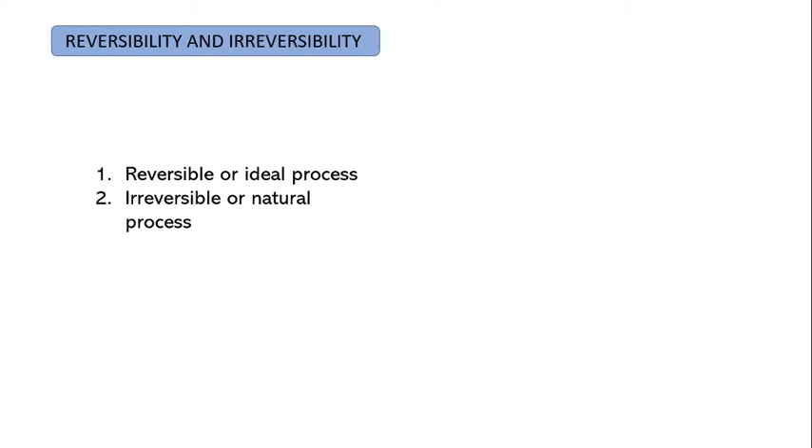A reversible process is one performed such that at the conclusion of the process, both the system and surroundings may be restored to their initial state without producing any changes in the rest of the universe. Let the state of a system be represented in the xy coordinate, represented by A, and let the system be taken to state B by following path AB. If the system and surroundings are restored to their initial states and no change in the universe is produced, then process AB will be a reversible process.

In the reverse process, the system has to be taken from state B to A by following the same path BA. A reversible process should not leave any trace or relic behind to show that the process had ever occurred. A reversible process is carried out infinitely slowly with an infinitesimal gradient, so that every state passed through by the system is an equilibrium state. So a reversible process coincides with a quasi-static process.

Any natural process carried out with a finite gradient is an irreversible process. A reversible process, which consists of a succession of equilibrium states, is an idealized hypothetical process approached only as a limit. It is said to be an asymptote to reality. All spontaneous processes are irreversible.

Time has an important effect on reversibility. If the time allowed for a process to occur is infinitely large, even though the gradient is finite, the process becomes reversible. However, if this time is squeezed to a finite value, the finite gradient makes the process irreversible.

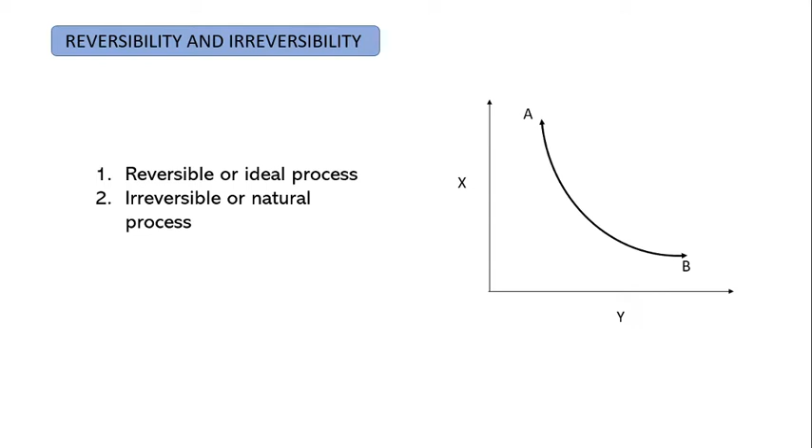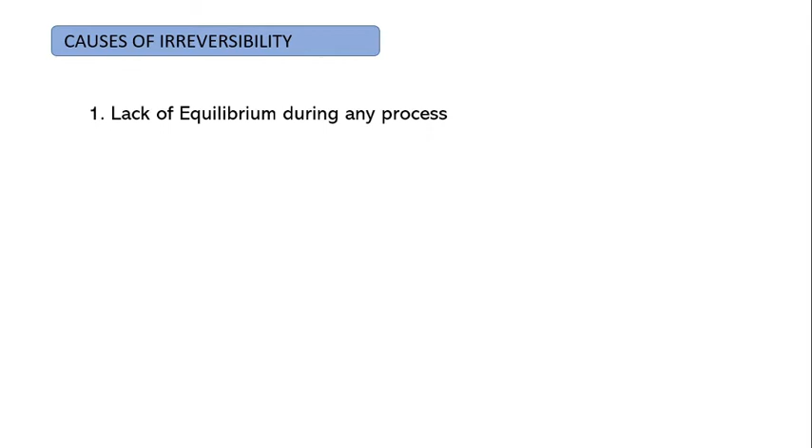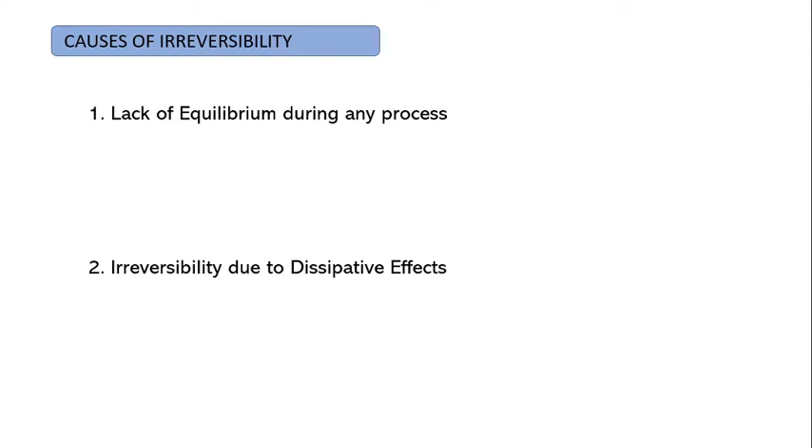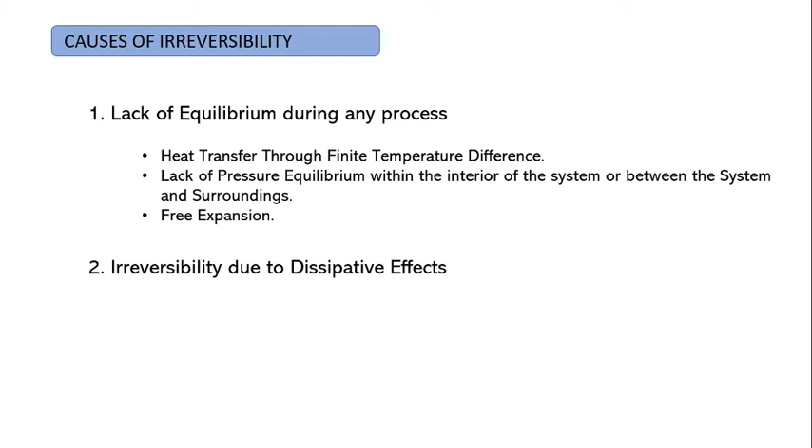So, what are the causes of irreversibility? The irreversibility of a process may be due to either one or both of the following: lack of equilibrium during any process, and irreversibility due to dissipative effects. Lack of equilibrium during any process includes heat transfer through finite temperature difference, lack of pressure equilibrium within the interior of the system or between the system and surroundings, and free expansion of any gas. Irreversibility due to dissipative effects includes friction, paddle wheel work transfer, and transfer of electricity through a resistor.

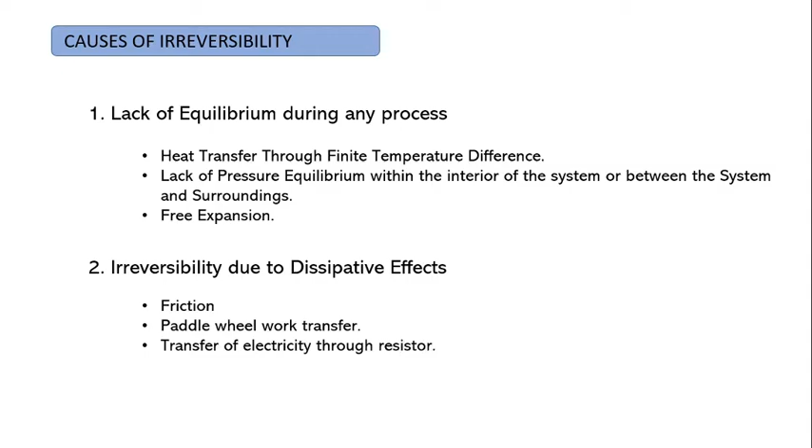So at first, I will discuss the Carnot cycle. Basically, the Carnot cycle is a reversible cycle. So what is a reversible cycle? A reversible cycle is an ideal hypothetical cycle in which all the processes constituting the cycle are reversible. The Carnot cycle is a reversible cycle.

For a stationary system, as in a piston and cylinder machine, the cycle consists of four successive processes, which can be described by the figure I have shown. The first process is a reversible isothermal process, in which heat Q1 enters the system at T1 reversibly from a constant temperature source at T1, when the cylinder cover is in contact with the diathermic cover A. The internal energy of the system thus increases.

The second process is a reversible adiabatic process, in which the diathermic cover A is replaced by the adiabatic cover B, and work WE is done by the system adiabatically and reversibly at the expense of its internal energy, and the temperature of the system decreases from T1 to T2.

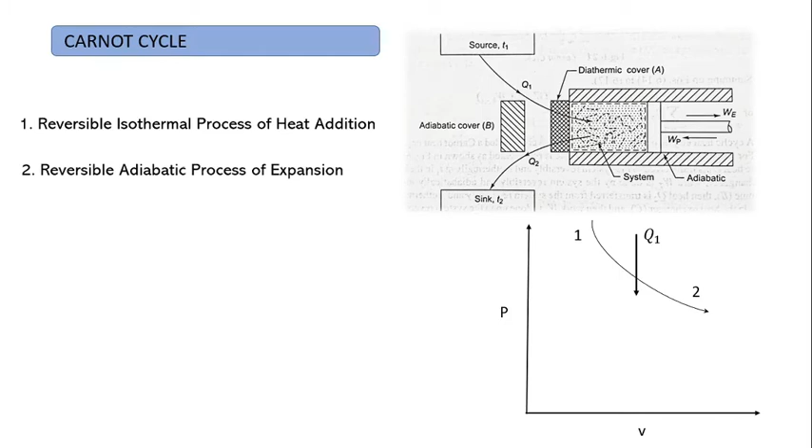If we plot all the processes in a PV diagram, we get the first process in which heat Q1 is added to the cycle reversibly, and the system changes its state from state 1 to state 2. The second process is the reversible adiabatic process of expansion, in which the system changes its state from 2 to 3, doing WE amount of work.

The third process is the reversible isothermal process of heat rejection, in which the system releases Q2 quantity of heat and changes its state from 3 to 4. The last process is the reversible adiabatic process of compression, in which the surroundings does some work, which is Wp, on the system, and the system changes its state from 4 to 1. Thus 1, 2, 3, 4 constitute a Carnot cycle.

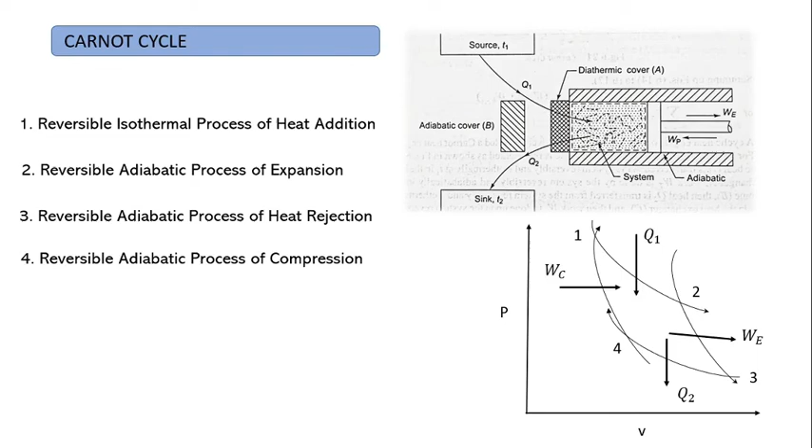So our next topic is the reversed heat engine or a reversible heat engine.

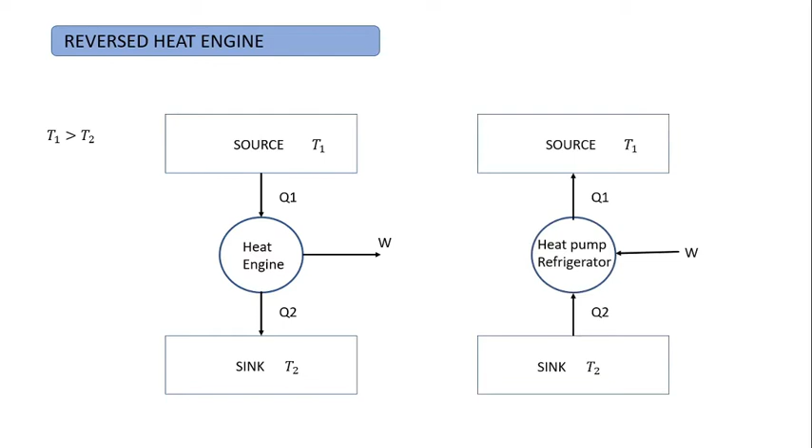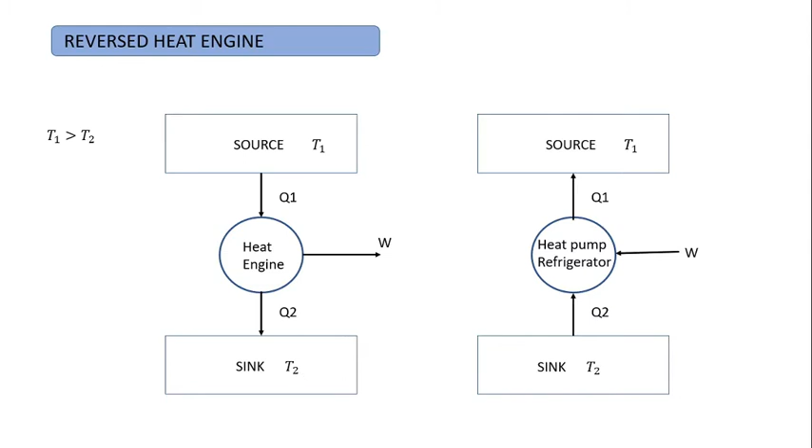A reversible heat engine means that the direction of the heat and work entities can be reversed, but that will not affect the surroundings. That means if we reverse the direction of heat and work for the heat engine, and if it is a reversible kind of heat engine, then it will act like a heat pump or refrigerator, but the quantity of heat Q1, Q2 and W will remain the same, which will not affect the universe or the surroundings.

Now come to a theorem which is termed as Carnot's theorem. According to this theorem, no heat engine can be more efficient than a reversible heat engine operating between the same temperature limits, which is the temperature of heat addition and the temperature of heat rejection, and all reversible heat engines operating between the same temperature limits have the same efficiency.

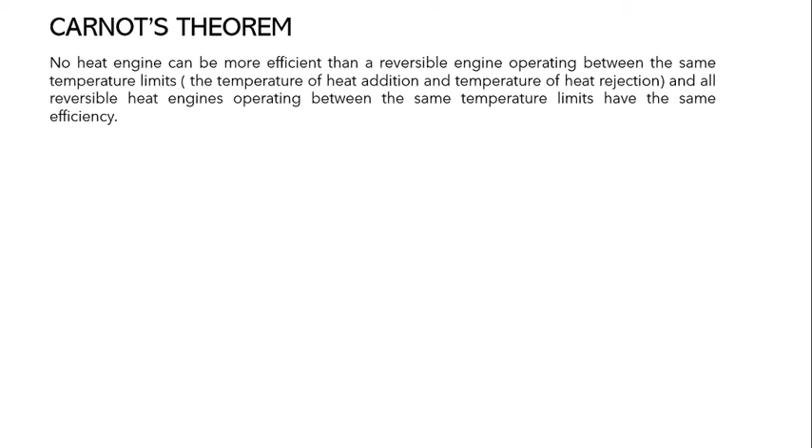From Carnot's theorem, we can say that if there are two heat engines between a source at temperature T1 and a sink at temperature T2 - if one is a reversible heat engine drawing Q1 reversible from the source and ejecting Q2 reversible to the sink by delivering W reversible amount of work, and another heat engine which is not reversible extracts Q1 quantity of heat from the source and rejects Q2 quantity of heat to the sink by delivering W quantity of work done - then according to Carnot's theorem, it can be said that...

The efficiency of the reversible heat engine is always greater than the efficiency of the normal or the non-reversible kind of heat engine.

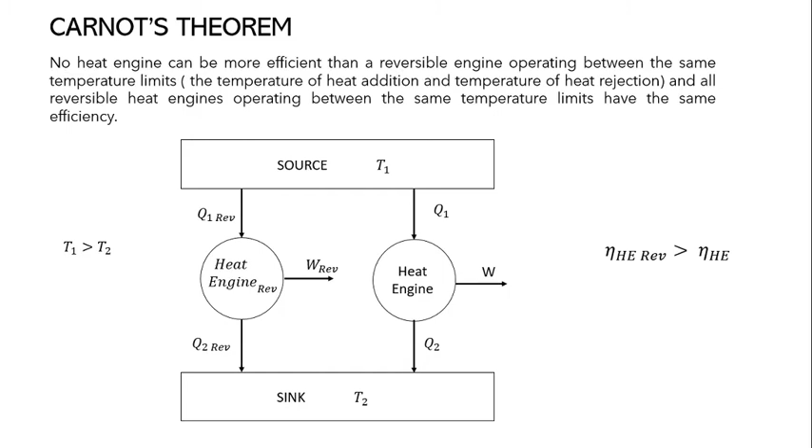Let's see how this is valid. This is the source, which is at temperature T1, and this is the sink, which is at temperature T2, and obviously T1 is greater than T2. So we are adding a normal heat engine and also a reversible kind of heat engine within the same temperature limits, that is, within the same source at T1 and sink at T2.

So now for the comparison of these two heat engines, we can say that the efficiency of the reversible heat engine can be greater than the efficiency of the normal heat engine, or the efficiency of the reversible heat engine can be less than the efficiency of the normal heat engine, or the efficiency of the reversible heat engine will be the same as the efficiency of the normal heat engine. So these are the 3 points that can be drawn generally while comparing two heat engines.

But from the structural point of view and from the application of thermodynamics, it is clear that a normal heat engine and a reversible type of heat engine are not the same. That means the efficiency of the reversible heat engine cannot be the same as the efficiency of the normal engine. So to prove Carnot's theorem, let us assume that the efficiency of the reversible heat engine is less than the efficiency of the normal heat engine.

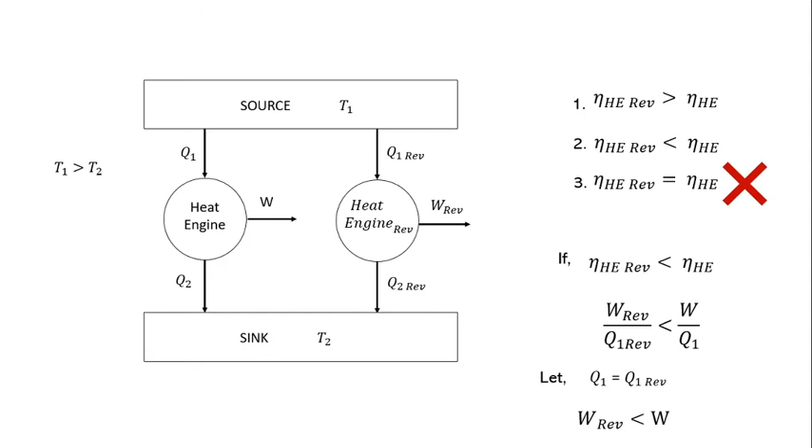From the expression of efficiency we can write this, and if we consider that both heat engines are drawing the same quantity of heat from the source T1, then we can say that W rev, that is the work done by the reversible heat engine, will always be less than the work done by the irreversible type of heat engine.

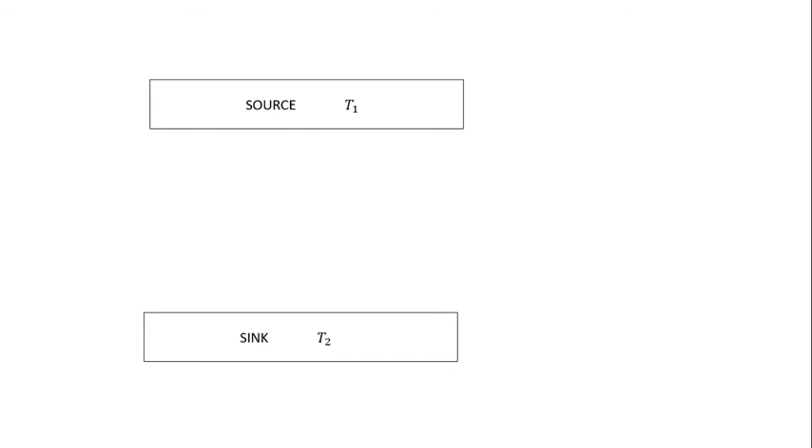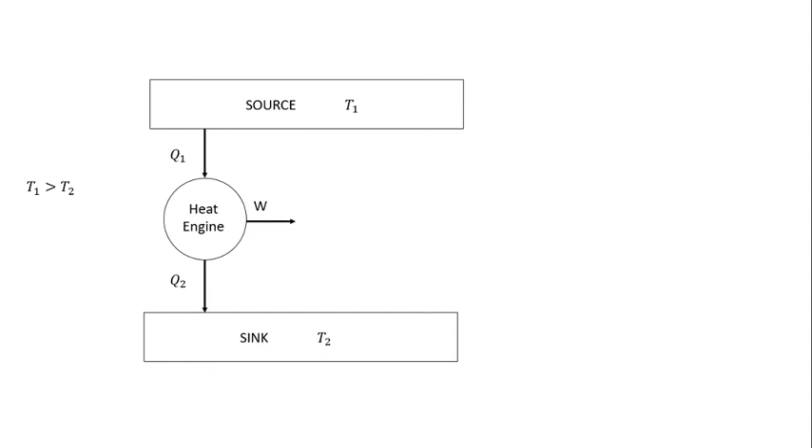So now we are assuming that we have a source at T1 and a sink at T2, and T1 is greater than T2, and we are attaching one irreversible type of heat engine and a reversible type of heat engine, as shown in the previous figure. As the second heat engine was a reversible kind of heat engine, we can reverse the direction. So the direction of Q2 reverse, Q1 reverse and W reverse has been reversed.

That means the reversible heat engine is now drawing Q2 reversible quantity of heat from the sink, and it is delivering Q1 reversible heat to the source which is at T1.

So now, as we have mentioned, Q1 reversible equals Q1, so it can be thought that the heat released by the reversible heat engine can be given directly to the irreversible heat engine, which indicates that we don't need a source, and this source can be eliminated.

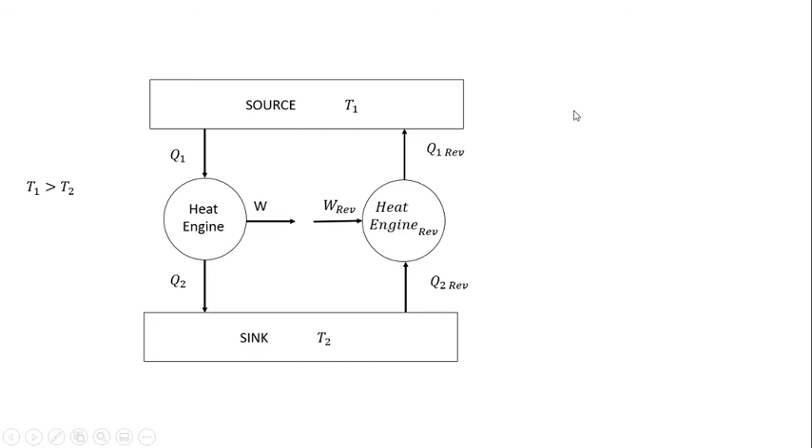So now the status becomes that these two heat engines altogether are working and producing a net work which is W minus W reversible, with a single reservoir which is the sink.

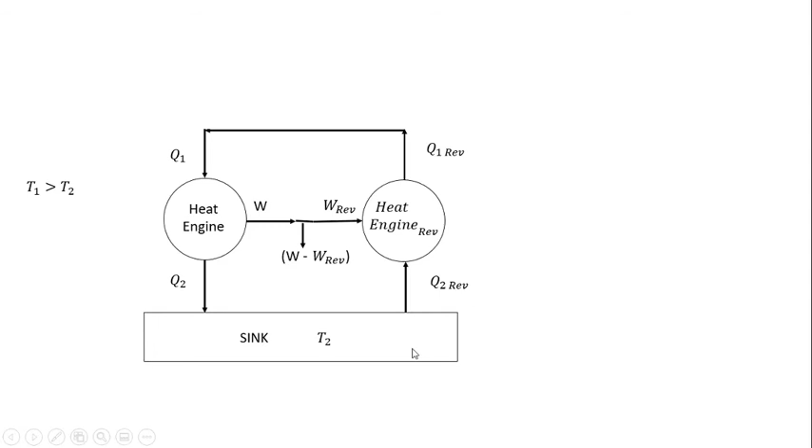This is obviously a violation of the Kelvin-Planck statement, as we have learned in previous classes. That means what we assumed in the previous slide, that the efficiency of a reversible heat engine can be less than the efficiency of an irreversible heat engine, is wrong.

That means we are left with only one choice, which is that the efficiency of the reversible heat engine is greater than the efficiency of the irreversible heat engine. Thus, the statement of Carnot's theorem has been proved.

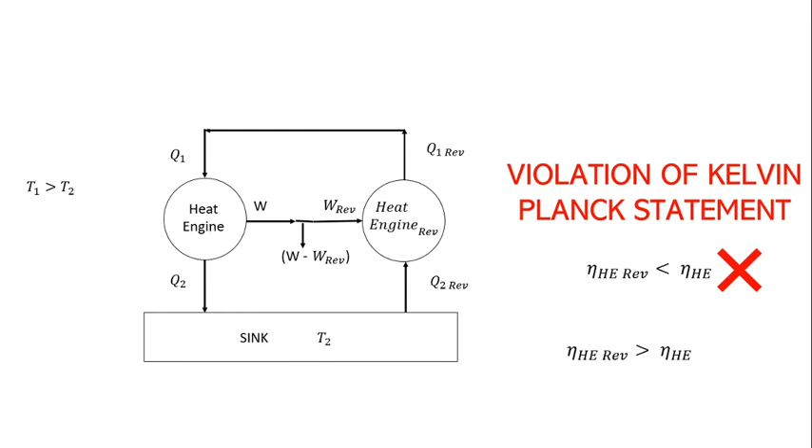Now, what is an absolute thermodynamic temperature scale? Basically, if we consider this as a heat engine, as I discussed in previous slides, we can say that the efficiency of this heat engine can be written as W by Q1, which can further be written as 1 minus Q2 by Q1. Let this be equation number 1.

Also, by the second law, it is necessary to have a temperature difference to obtain work for any cyclic heat engine. We know that the efficiency of all reversible heat engines operating between the same temperature levels is the same, and it is independent of the working substance.

Therefore, for a reversible cycle, the efficiency will depend solely upon the temperatures T1 and T2 at which heat is transferred, or it can be written that the efficiency of a reversible heat engine is a function of T1 and T2, where F signifies some function of the temperatures.

So from equation 1 and 2, we can write that 1 minus Q2 by Q1 equals the function of T1 and T2. From there, we can write that Q1 by Q2 equals 1 by 1 plus the function of T1, T2, and this can also be termed as a new function, capital F.

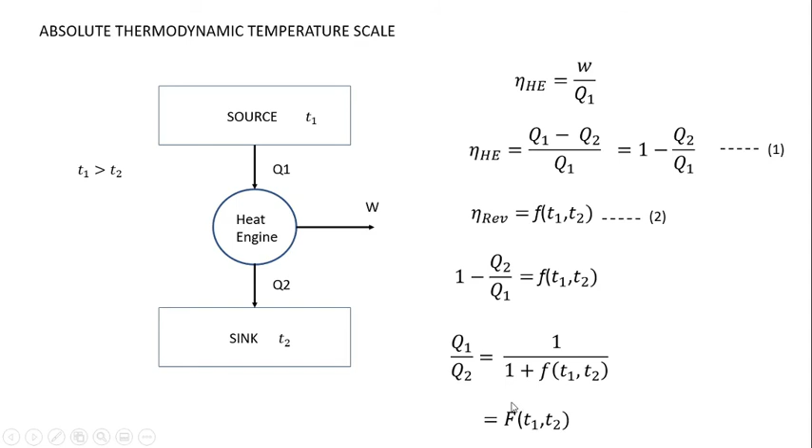Now, if we consider a source which is at T1 and a sink at T3, and we attach two heat engines, let T2 be the intermediate temperature.

This heat engine 1 is absorbing Q1 quantity of heat from the source T1 and delivering W1 amount of work by ejecting Q2 quantity of heat at the reservoir T2, from where heat engine 2 is drawing Q2 quantity of heat and delivering W2 quantity of work by ejecting Q3 quantity of heat to the sink.

Now, both these heat engines can be replaced by a single heat engine with the same temperature source and sink, and let us consider that W3 equals W1 plus W2.

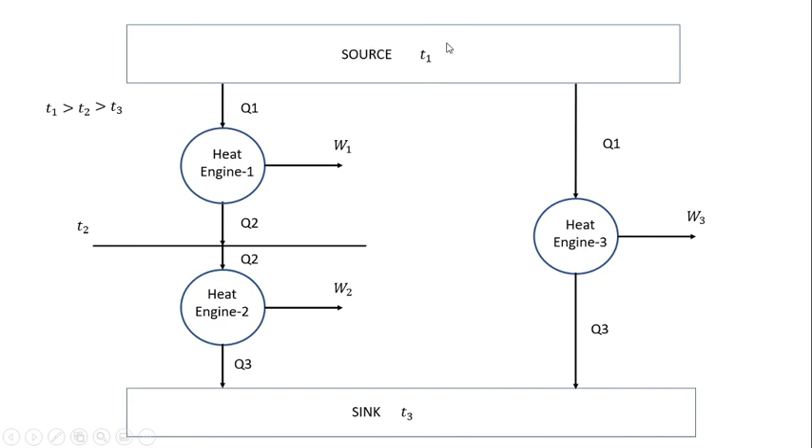That means the total work produced by these two heat engines is now produced by the single heat engine, heat engine 3, which is working between the same temperature source and sink, at temperature T1 and T3.

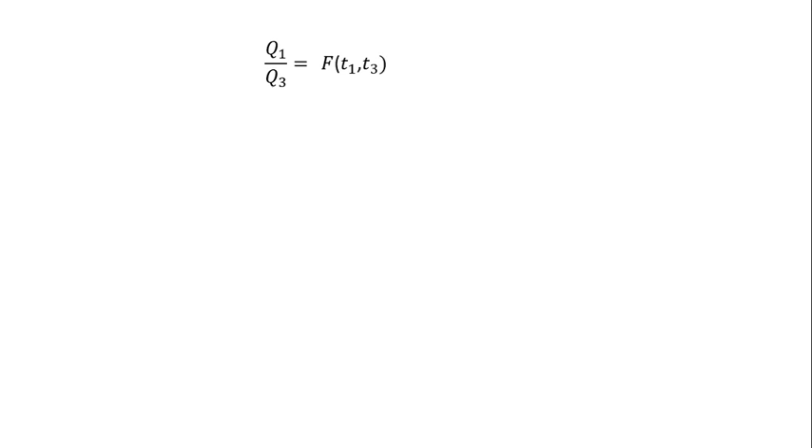So from the expression learned in the last slide, we can say Q1 by Q3 equals the function of T1 and T3. Now Q1 by Q2 can be written as (Q1 by Q3) by (Q2 by Q3). So we can write Q1 by Q3 is the function of T1 and T3, and Q2 by Q3 is the function of T2 and T3.

The temperatures T1, T2 and T3 are arbitrarily chosen. The ratio Q1 by Q2 depends only on T1 and T2, and is independent of T3. So T3 will drop out from the ratio in the equation.

After it has been cancelled, the numerator can be written as phi of T1 and the denominator can be written as phi of T2, where phi is another unknown function.

Since phi is an arbitrary function, the simplest possible way to define the absolute thermodynamic temperature T is to let phi of T equal capital T. This is proposed by the scientist Kelvin.

Then by definition we can write Q1 by Q2 equals T1 by T2. This capital T1 is the Kelvin scale temperature of the source, and capital T2 is the Kelvin scale temperature of the sink. So the absolute thermodynamic temperature scale is also known as the Kelvin scale.